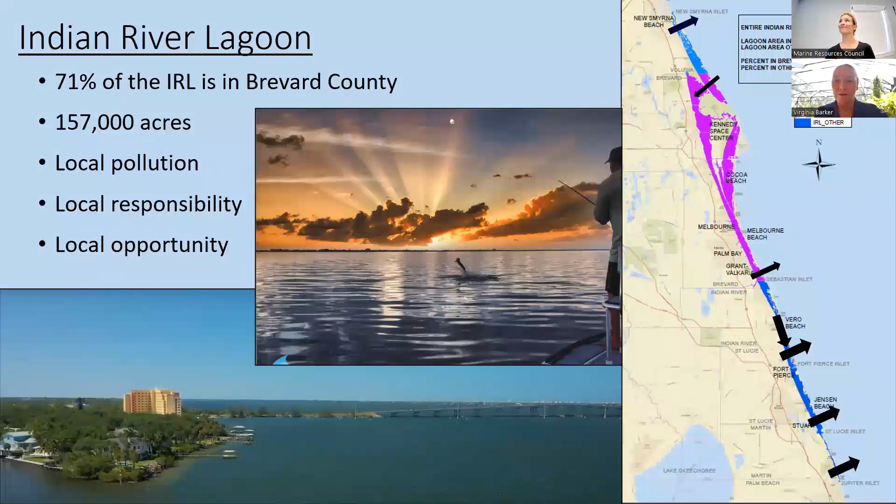We have delivered 81 projects now, and we have 27 that are currently under construction and 43 more in design. Those are bigger projects. In addition, we have loads of individual homeowner projects, of which 677 have been completed. And then we monitor the performance of a subset of our projects to make sure that they are delivering what we expect them to deliver in terms of performance.

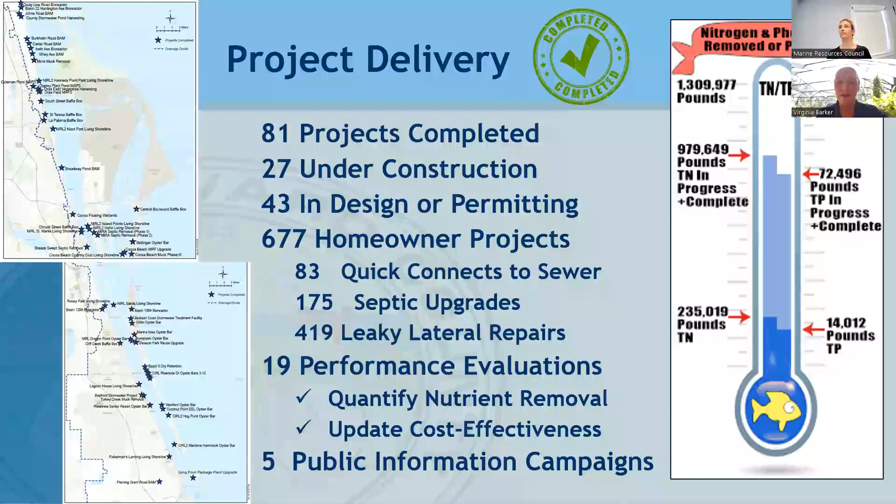And we have some public information campaigns to help the public know what they can do to reduce their footprint of pollution on the lagoon.

And when I say we have completed 81 projects, it's a big royal community-wide we. So you see there, the cities are all very much engaged, along with Brevard Zoo and MRC and the Merritt Island Redevelopment Agency.

So it takes a village.

And our strategy is to reduce the incoming sources of nitrogen, excess nitrogen and phosphorus pollution, remove the excess legacy load that's already in the lagoon, begin restoration of natural filter feeders, and then respond to new information and opportunities.

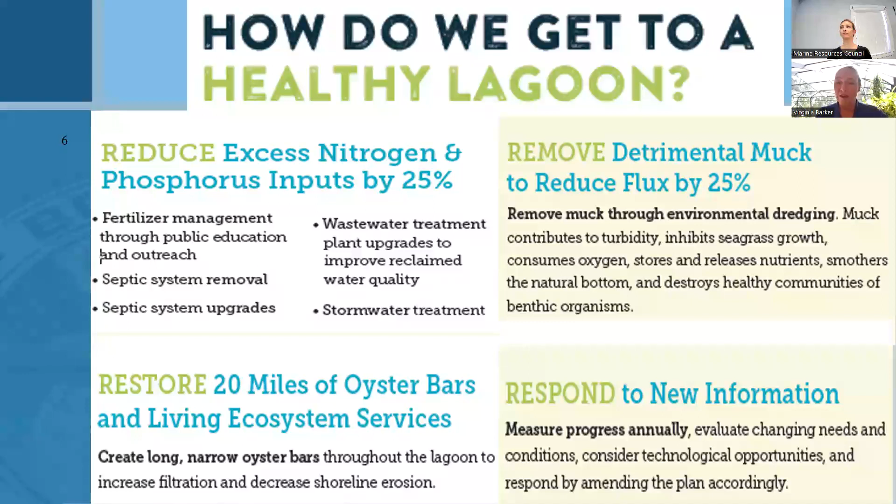The structure of the plan is a decision science kind of structure, using the best available data and experts at the time. Don't wait for perfect answers before moving forward. Take what we know, pick those no-regret strategies and get going, and then continue to refine as we go.

Aim for the major sources of pollution, schedule projects in parallel and in series. So some projects make sense to do before other projects.

Ideally, we would stop polluting before we started removing pollution from the lagoon, but there's so much pollution in the lagoon, and so much pollution still coming in, that we really can't wait and do it in that order. We've got to do both in parallel.

But we are conscientious where we can, trying to reduce upland sources before removal projects in specific areas. And our goal is to optimize the return on that local investment of tax dollars.

We're also hoping to foster innovation, and in fact we have already fostered innovation and adaptation to minimize cost and risk going forward.

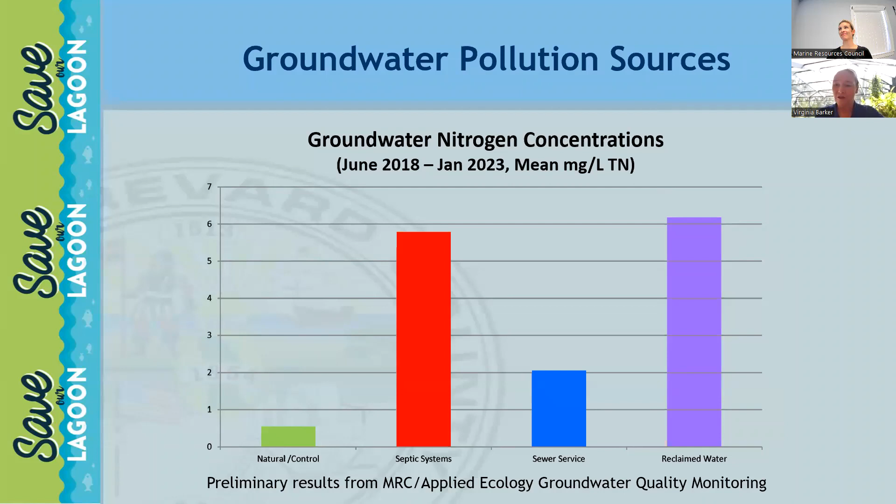The first thing are wastewater treatment facility upgrades to reduce the nutrient concentration in reclaimed water. Over $27 million is going to 8 projects. Of those, 4 have been completed, 1 is under construction, and 2 are in design. Collectively, those projects are going to remove 74,000 pounds of excess nitrogen per year, at a cost of $383 per pound.

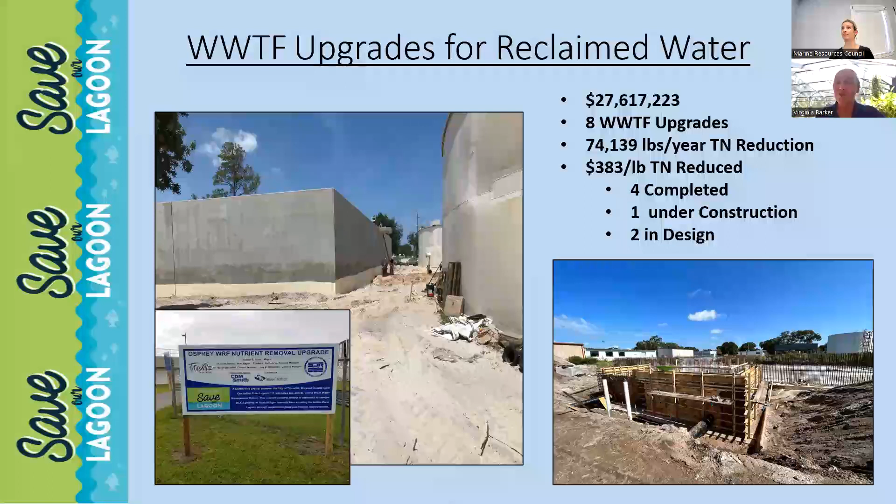These statistics I'm going to run through for the project types that are in the plan, so you'll be able to see which project types are getting the majority of the funds, how many projects there are, how much loading they're going to reduce, and what their cost effectiveness is.

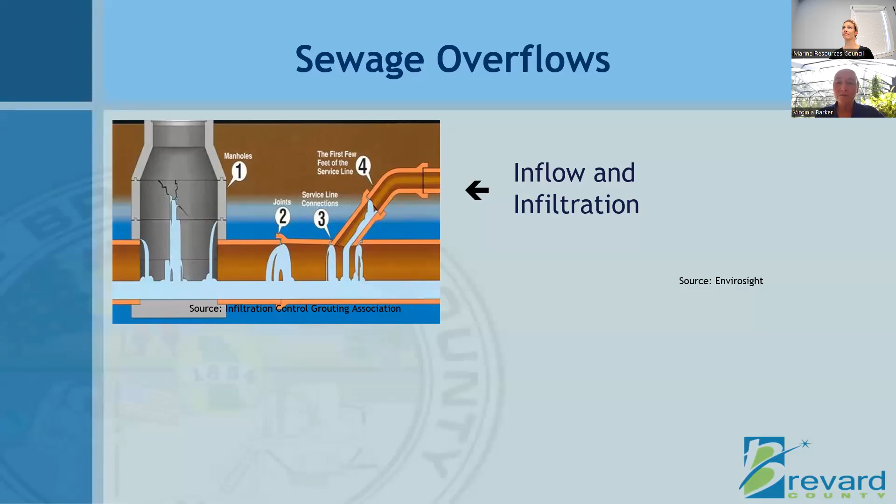Shortly after adoption of the half-cent sales tax, a hurricane came through and there were sewage overflows. Trying to understand where those sewage overflows came from, we realized that we have a lot of leaking and failing sewage infrastructure.

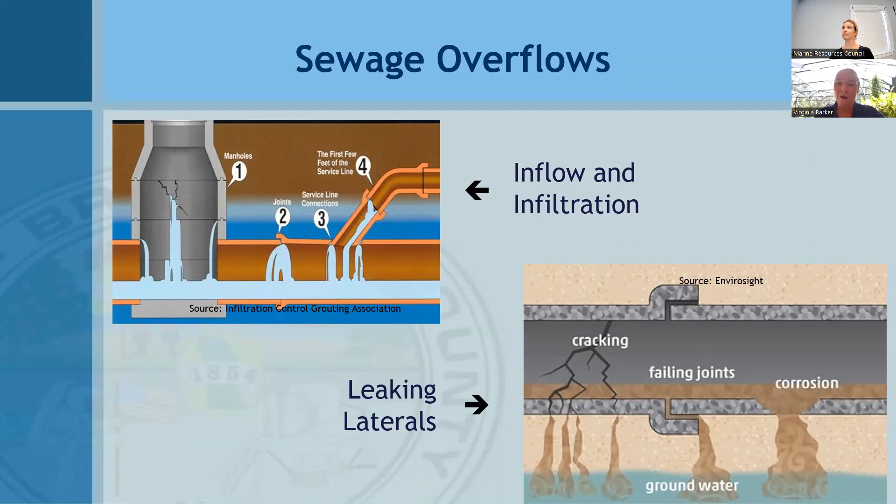The wastewater treatment plants have been using smoke testing and cameras to try to better maintain and strengthen their collection systems. But all the private pipes from people's homes, from the connection at your home out to the right-of-way where you connect to the public system, are also old and aging and have leaks in them. So we funded smoke testing to identify where those leaks were.

We completed 4 out of 5 smoke testing projects. Over 41,000 homes have been smoke tested, and of those we found 649 leaks. About 2/3 of those leaks have been repaired so far.

We were super excited to work with the private owner to abandon this system and get it connected to centralized wastewater treatment. We're now moving forward with 3 more private property owners to abandon their package plants and connect them to central sewer.

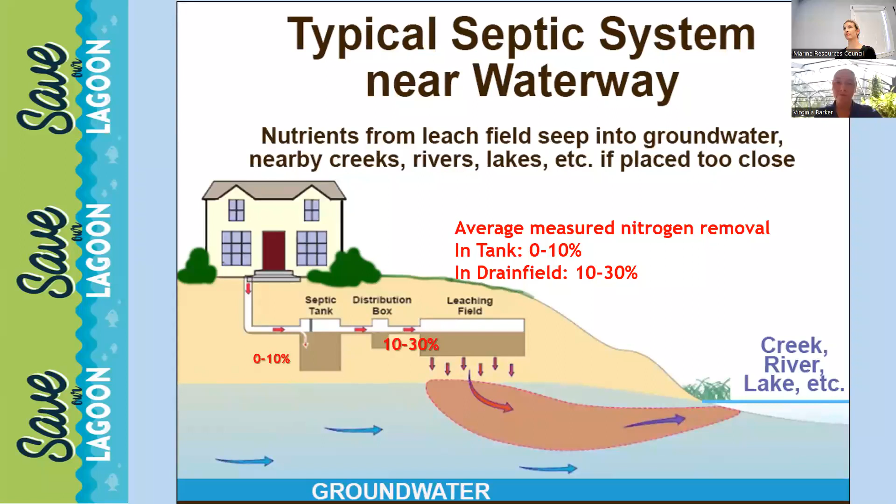So I know we've been through this in past years, but there are recent articles that seem to confuse, take our data and recombine it in an improper way. So I want to try to run through this if my voice holds out.

So we have over 53,000 septic tanks in Brevard County that load to the Indian River Lagoon, and they're distributed at various distances from the open water.

And about 15,000 of those 53,000 are close to the water, within 55 yards of the water. And because those systems are so close to the water, they are the ones that load the most nutrients to the lagoon. All the septic in the county loads about 400,000 pounds of nitrogen to the lagoon.

Those 15,000 that are closest to the lagoon are responsible for nearly 300,000 pounds, so almost three-quarters of that loading.

So if we don't have enough money to do everything, we want to focus on those that are going to make the biggest difference. When we look at those 15,000 systems and look specifically at the conductivity of those soils, how sandy they are, you see that the ones in the sandiest soil, the 8,000 in those highest conductivity soils, are responsible for over half, 200,000 pounds, of that loading.

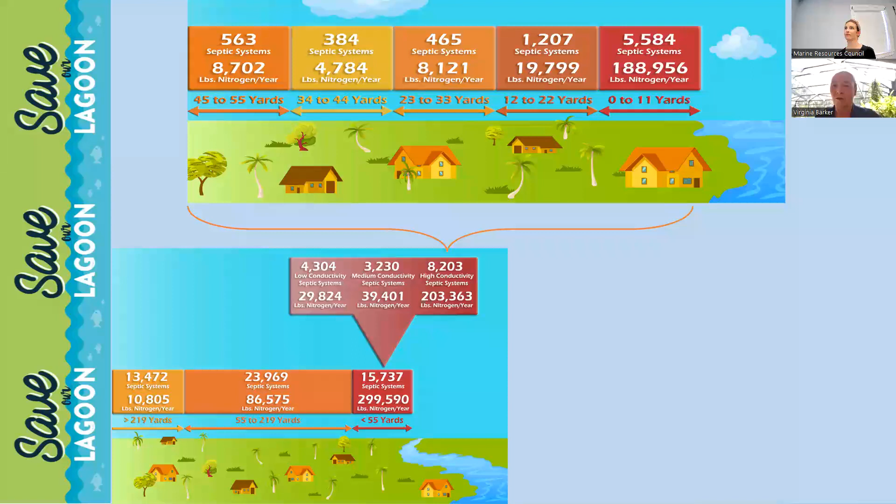So, okay, we can zero in on those 8,000 systems. Then if you take those 8,000 systems and look even more closely at how close they are to open water, the 5,600 of them that are within 30 to 35 feet of the lagoon are responsible for almost half of the loading. Those that are in sandy, high conductivity soils, very close to the lagoon, are responsible for nearly half of the loading.

So of those 53,000 tanks loading 400,000 pounds to the lagoon, we could, in theory, focus on just roughly 10% of them and reduce that load by about 50%.

Now, the trick to that is that we can't just magically have sewer delivered to those specific homes. You have to bring in a sewer line from wherever the nearest lift station is. You've got to pass through a whole community. If you're running a sewer line down a street, you're not going to just hook up the people on the waterfront side of the road.

And if the streets are perpendicular to the lagoon, you're not going to just run the whole line down the street to pick up the house at the end of the road. You're going to pick up all the houses along that street.

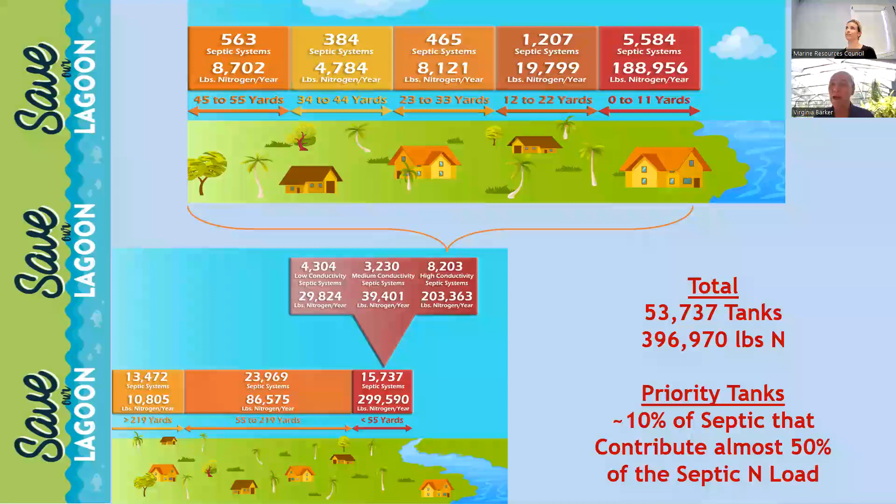So for our sewer projects, we mapped where these most important systems are to focus on. Then we looked at where there are clusters of those, and then we looked at how we would get sewer service to those clusters and identified which ones were most feasible.

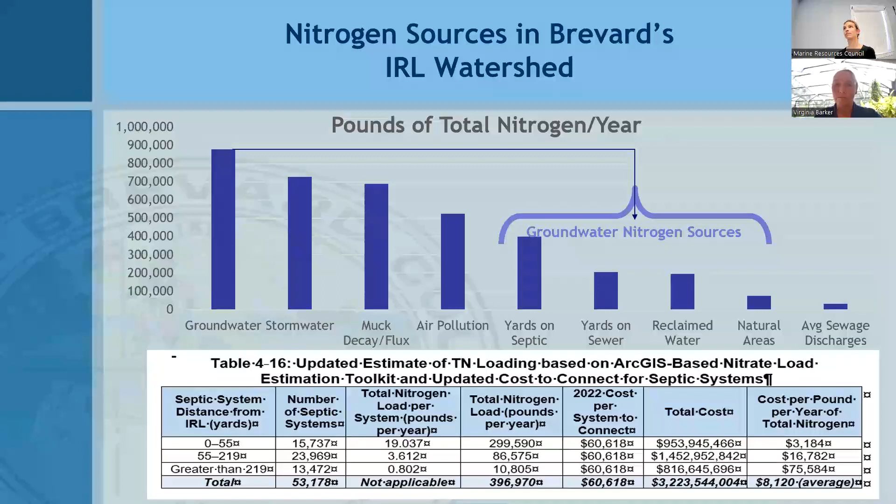So in addition to the septic to sewer projects, we also have septic systems that remain in the ground that are adjacent to existing sewer lines. And these are scattered through different neighborhoods, different communities, different cities throughout the county.

So for septic to sewer projects, we're investing 120 million on 47 projects. These are extremely difficult projects to implement in existing neighborhoods with narrow right-of-ways, with loads of utilities in the right-of-ways, people's driveways, people's yards—just difficult, messy projects. And it's tough to design. They take a lot of time. So there are only 4 that are complete, though there are a dozen or more that are under construction right now. They will, once completed, connect nearly 5,000 of those top priority properties and reduce loading by about 100,000 pounds.

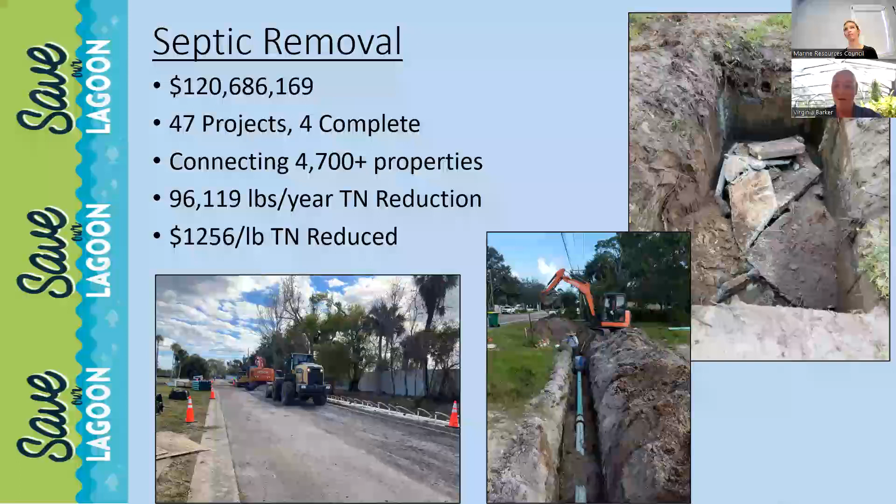All right, then we also have $11 million to connect—we call this our Quick Connect program—those septic systems that are adjacent to existing sewer lines. So we've identified properties throughout that can connect to nearby lines and are providing homeowner grants to do that. And that will reduce another 21,000 pounds. Those are also fairly cost-effective projects.

Then we have many of those highest priority septic systems that are not in a good cluster, are very difficult to reach—they're just not feasible to bring sewer service to. So for those, we have homeowner grants to upgrade to advanced nitrogen reducing septic systems. There's nearly $30 million available for those grants. So far, we've been able to double that SOIRL funding with state grants for most of the projects completed so far. Hopefully we'll be able to upgrade nearly double this 1,600 tank target, which would also increase the load reduction and reduce the cost per pound of these systems.

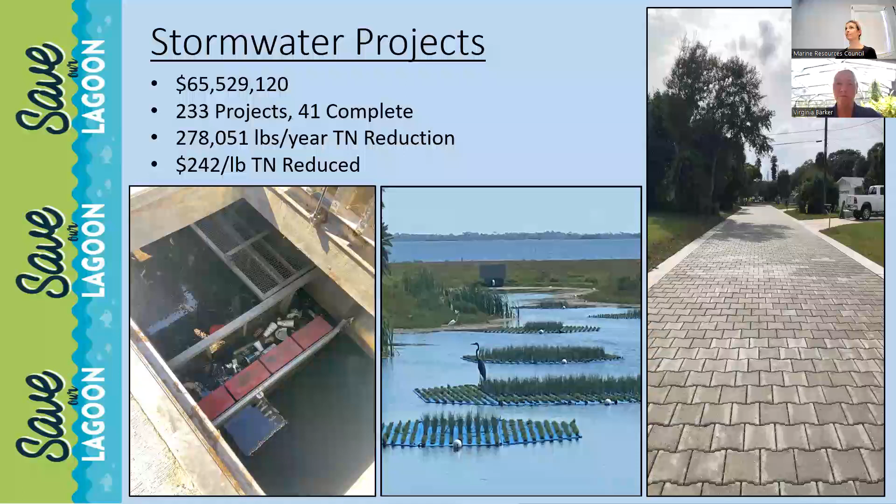Vegetation harvesting is a new kind of project that was added after the original plan adoption.

We have loads of drainage canals and they have nutrients in them, and those nutrients feed plant growth. Over the last couple decades, the way plant growth has been managed primarily is through herbicides. None of us like using herbicides or the potential harm they can do. But most important to the health of the lagoon is that when those plants are poisoned and die and rot, they release nutrients and consume oxygen.

It's the impact of that rotting vegetation that is more harmful than the herbicide use. Nonetheless, vegetation harvesting, if we just mechanically remove that vegetation, we're pulling nutrients out of the system and avoiding the use of herbicides. So the half-cent sales tax has been funding vegetation harvesting projects.

There are currently 10 in the plan. 5 of those are already complete. They're removing tens of thousands of pounds of nitrogen reduction.

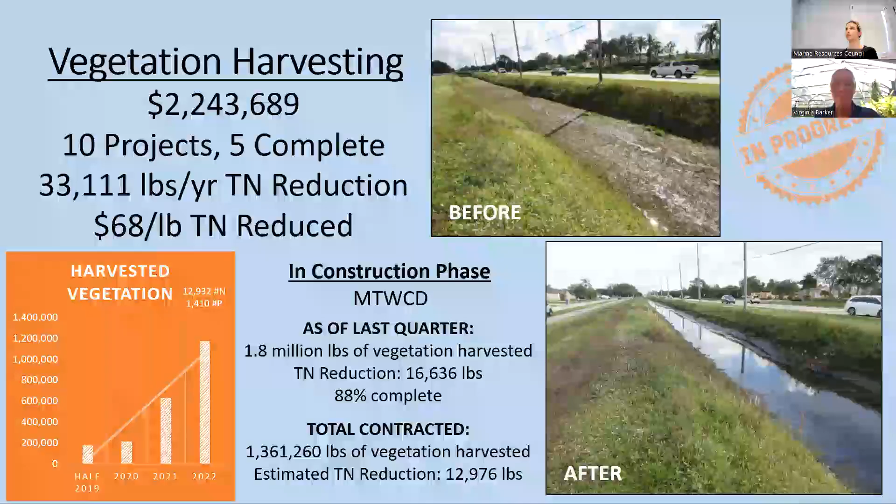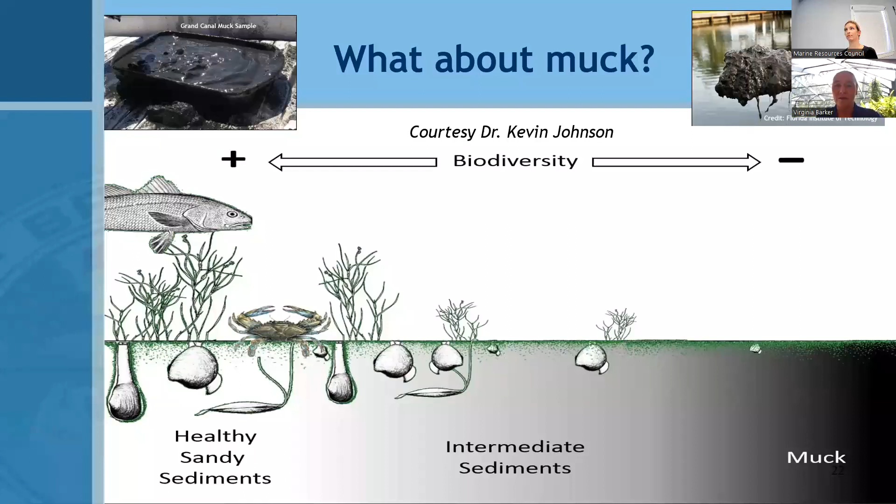So we measure the benefit of these muck projects not in terms of how much muck we removed, but in terms of how much we're reducing that annual flux of nitrogen and phosphorus out of the sediments into the water column. The plan includes $113 million worth of funding for 19 projects. Of those, 4 complete, they will remove or reduce the annual flux by over 200,000 pounds. The cost effectiveness there is about $500 per pound.

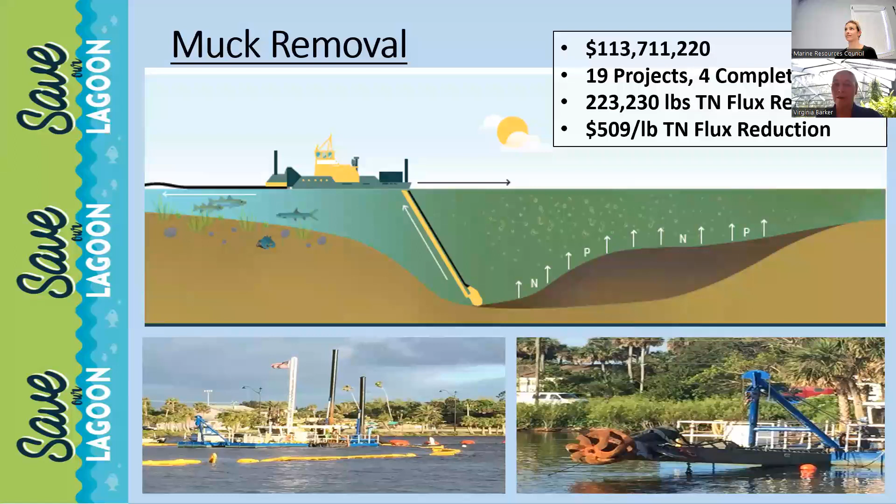Then we came up with this idea of interstitial water treatment. So what is that? When we dredge, one of the first things you have to do is separate the water from the solids. When we're squeezing the water out of the solids, there's a lot of already released nitrogen and phosphorus in that water.

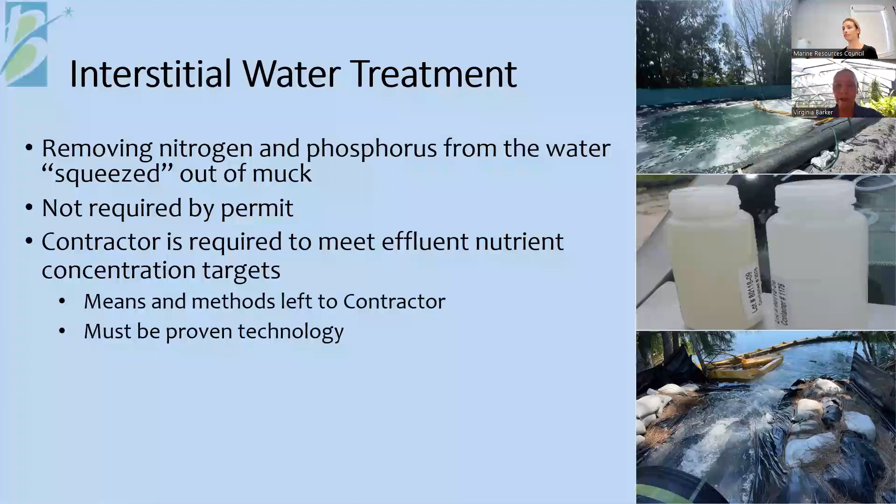This treatment process is not required by our permits. It's something completely extra that we wanted to try to do. We asked the contractors if they thought they could do it, and how much they thought they could do. We set targets that they believed they could meet, and then left the means and methods up to whoever the low bid contractor is for the dredging work. They have to provide data to us to show why they think their proposed technology will work, and they have to share information with the permitting agencies as well to make sure that what they're doing isn't going to harm anything.

We include performance targets in their contract, and as long as they meet those targets, they get paid. If they don't meet those targets, they don't get paid. Currently it's on a daily basis - the days they meet the targets, they get paid, the days they don't, they don't get paid. So there's an economic incentive for them to meet the targets.

The nitrogen target of 3,000 parts per billion, just 3 milligrams per liter, is the same target as advanced wastewater treatment, except instead of doing it at a fixed wastewater treatment plant, they're doing it on this highly variable little postage stamp site where we're dewatering muck, and the material quality ranges from place to place, moment to moment. It's a highly challenging target for them to meet.

The phosphorus standard of 75 parts per billion is about 14 times more stringent than advanced wastewater treatment, which is 1,000 parts per billion, or 1 milligram per liter. We set it this low because the lagoon needs really clean water and the industry can do it. So let's do it.

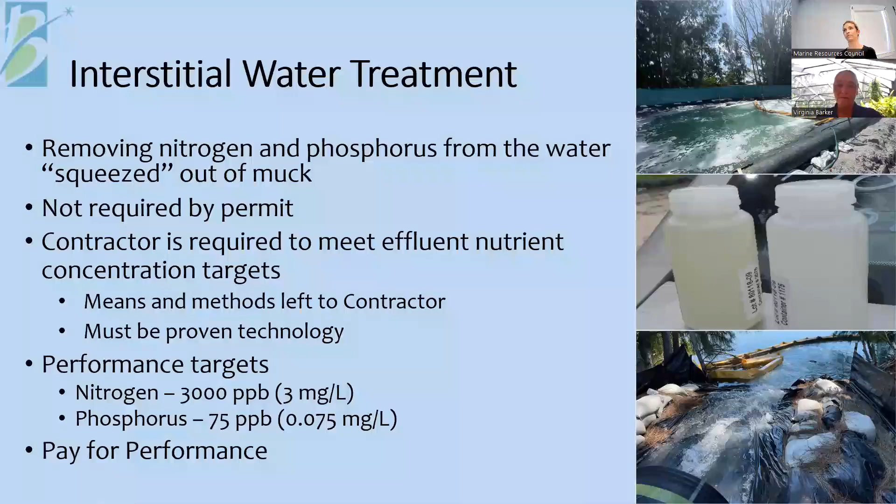In the MIMS contract, the contractor was not meeting the targets, and so they weren't getting paid for the treatment. After some period of time, they decided it wasn't worth their investment to keep trying to meet the targets, and they gave up. We were very frustrated by that, but there was nothing in the contract that allowed us to hold them to it, because it was just a pay-for-performance standard. If you meet the standard, you get paid; if you don't, you don't get paid for the treatment. You still get paid for the dredging, but not for the interstitial treatment.

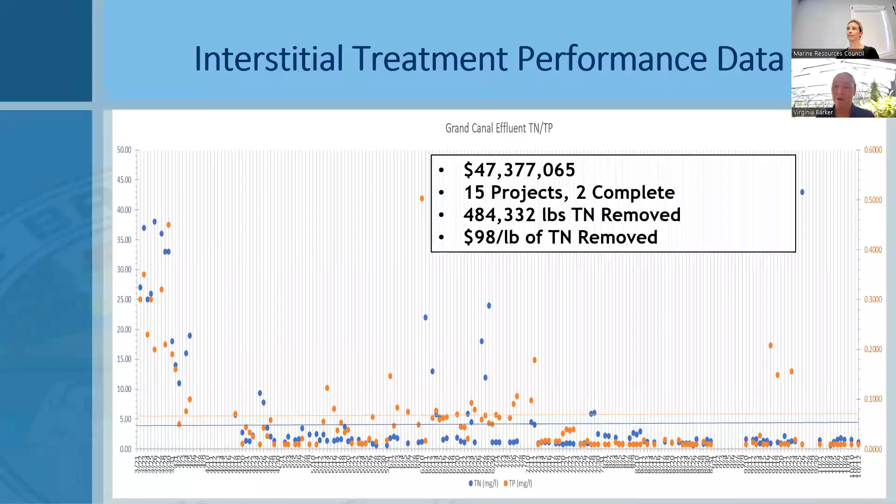All of these projects are really - we know that the lagoon isn't ready for large scale restoration yet, but there are areas and moments in time when these projects can succeed, and we are working to test different methodologies, different scales, different processes to see what works best in the Indian River Lagoon, so that as the lagoon water quality improves, we know what these systems need to succeed, and what's going to be the most cost-effective, most efficient design to get there. These projects are hopefully setting us up to be ready to expand to a larger restoration scale as water quality improves.

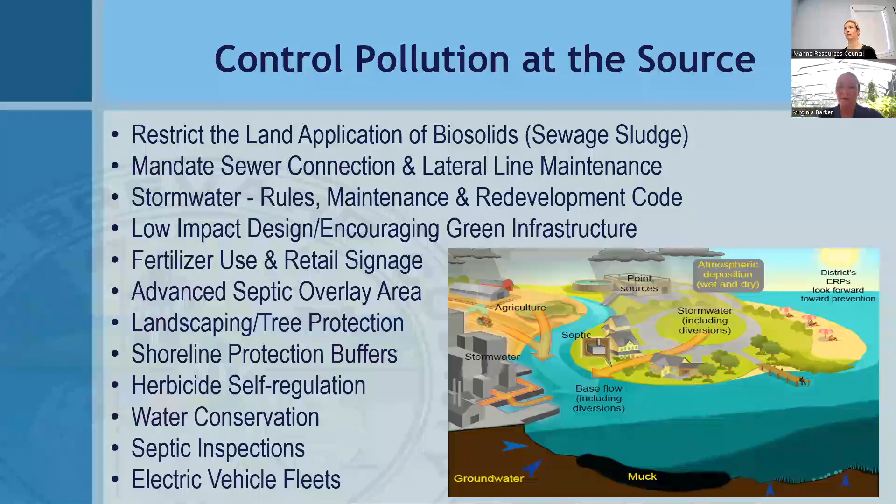And then electrical vehicle fleets—as we move towards more electric vehicles, there's less emissions. Vehicle emissions account for about 1/3 of the nitrogen pollution that falls out of the sky onto the lagoon, so having high efficiency vehicles is an important part of the equation.

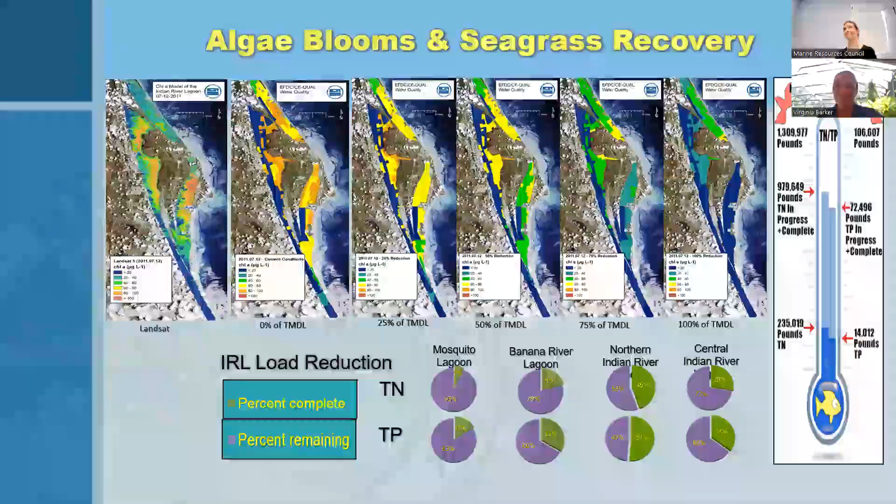A couple weeks ago we had our algae harvester. We received a $999,000 grant from the state to test this algae harvesting technology. We want to keep nutrients and pollution out of the lagoon, and remove the legacy of nutrients already there. But until we reach our TMDLs, we're going to have harmful blooms. Is there something we can do about those blooms proactively? That's what this harvester is about — chasing those blooms and seeing if we can scrub them out of the water, and as we do that, we're also removing nutrients.

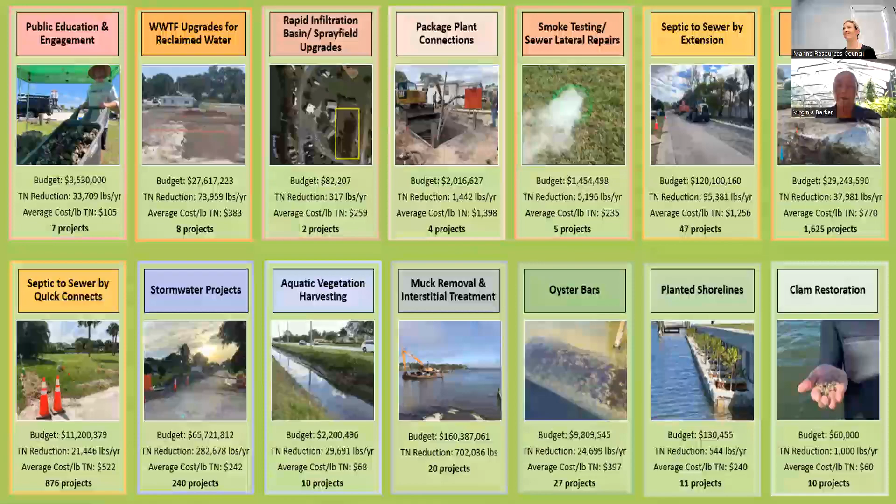That took a lot longer with all the coughing than I expected. My apologies.

Our vision is very much like the MRC's Imagine vision — an Indian River Lagoon teeming with fish, birds, and wildlife that provides for recreation, economic vitality, and pride in our community. Thank you for your attention.